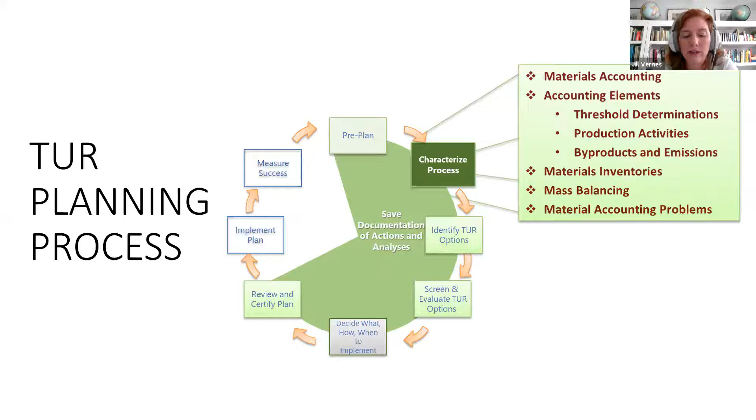Next slide, please, Dan. These are the big topics we're hoping to cover today. Data quality and validation—there are lots of simple checks you can do to ensure your data is accurate, correct, and representative of what's actually happening at your facility. It's essential to maintain consistency between what you report on your Form S and the numbers you use in your TUR planning process, but it's not necessary to reinvent the wheel. Lots of the material you produce for reporting can be used in planning and vice versa. Make sure you're using a good unit of product that will show TUR improvements, and there are lots of different options for that.

We'll have a discussion about that when we get there. And then integral recycling, which can be a tricky thing to wrap your head around, but make sure your integral recycling meets the TUR definition so that you can take credit for it when you get to the planning process. Next slide, so we'll jump into data quality—again, these are tips and tricks for getting better data sets.

Better data sets mean closer alignment between the materials accounting used for reporting and the TUR planning process. Again, I really want to ask that when we get to breakout rooms or polls, don't hesitate to share any ideas or best practices, or even pop those in the chat where they can be accumulated later. So just real quick, we'll run through some simple ideas you can use to help make sure you have a better data set.

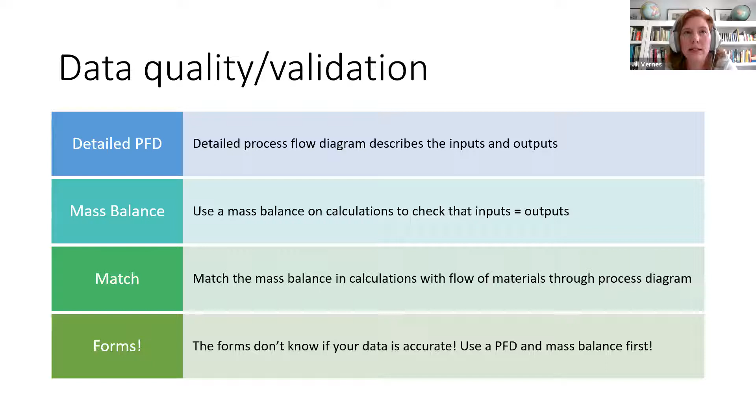So here's our first polling question. I've just launched a poll, and the question is: how often do you update your process flow diagrams? I'll give you a minute to fill that in. Do you do it every year? Every planning cycle? Every 5 years or so? Only when prompted by a production change or an engineer's comments? Or do you never do it, or not know how often it's done?

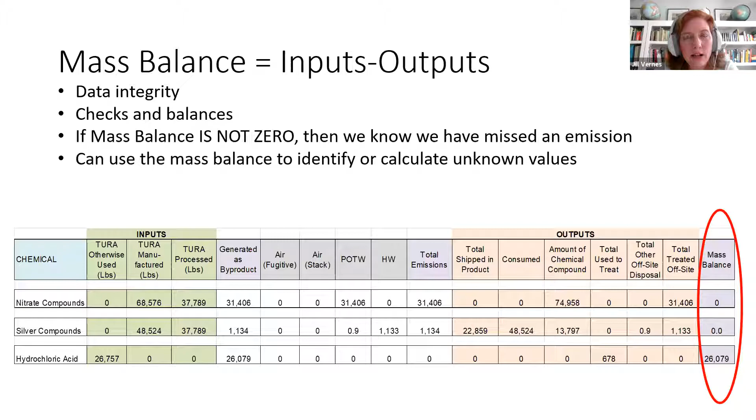I just wanted to real quick look at the difference between byproduct and emissions. Oftentimes they are the same. So in the case of nitrate compounds and silver compounds, the emissions are also the byproduct. But with hydrochloric acid, quite a bit of that is byproduct, but none of it is actually being emitted.

So what's the difference between byproduct and emission? Byproduct is anything that's not going into your final product, so that's a lot of the chemicals we account for as planners. It's the emissions, but also any material used to treat or pre-process materials in production, but not going out with the product. That's different from emissions, which are releases of toxic or hazardous substances to the environment. So byproduct includes emissions and also other non-product outputs.

Here we have a breakdown in my example of mass balance considerations. We'll jump to the bottom of this table on the left. For hydrochloric acid, all of that 26,758 pounds is being otherwise used in the process - some sort of treatment of materials in production, or maybe wastewater treatment, but not material going out with the product. Compare that to nitrate compounds or silver compounds.

In this case, this is a silver plating process. We've got silver nitrate being processed in the chemical processes to create that silver plate. In the chemical reactions, we're coincidentally manufacturing different compounds that need to be accounted for in the TUR process - those are all of our inputs on the left there. We need to make sure we're accounting for where all of that material ends up, whether shipped on the product in the case of silver, or sent to wastewater treatment in the case of hydrochloric acid and the nitrates.

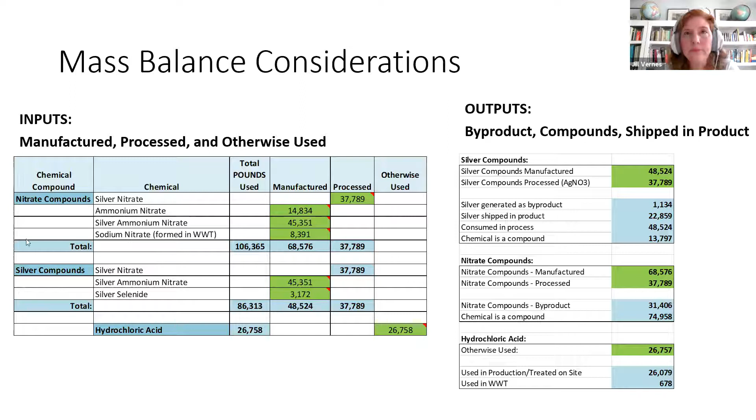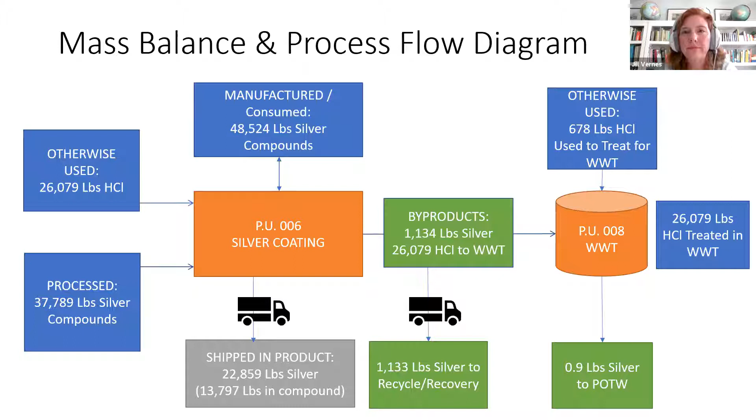We want to look at these things together and look for patterns of alignment. This process flow diagram is something required by the planning process, so you may have to change the numbers each year, but you should have this detailed process flow diagram already developed, which will help you analyze your data in conjunction with the mass balance.

Pam, do you want to say something else about that? No, I think that's it, thanks Jill.

I'll go ahead and launch a poll. We're asking you to take a look at both the mass balance and the process flow diagram and let us know what you see with respect to why the mass balance does not equal zero for hydrochloric acid.

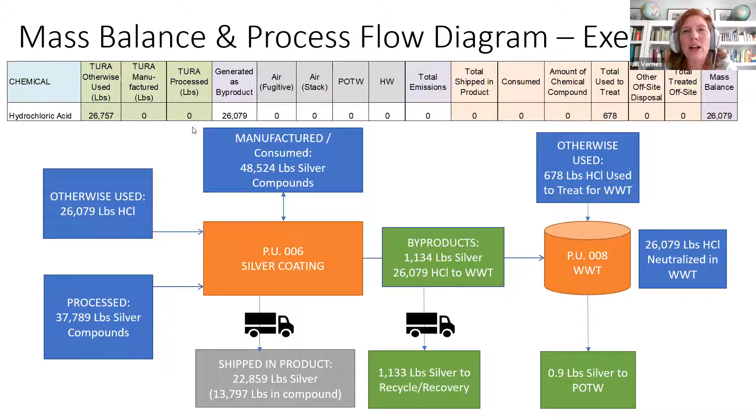And you can then match this 26,079 pounds in the mass balance where it's off to the 26,079 pounds that's neutralized in the wastewater treatment. But I also would like to request again that if there are other conceptual tools that planners use to check for mass balance and to check for alignment and consistency between the numbers you generate for reporting and the numbers that you use in your planning, please share those.

Either go ahead and speak up, I guess, or you can raise your hand electronically with Pam, or put those in the chat, because these are tools that we use. We use them for a lot of our clients, but we certainly don't have a monopoly on good ideas. So I'm always looking for good ideas as well.

Thanks, Jill. Another thing I want to point out is we had a couple people who thought that perhaps the hydrochloric acid was being shipped in product, and that's possible. So the question is, was there a trace amount of hydrochloric acid being shipped out in the product, and how would you determine that? A couple people responded that hydrochloric acid was emitted

to the POTW. I can see how that might have been the concern, knowing that it was generated as a byproduct. Right. And as we say, byproducts can be emissions, but they can also be non-product outcomes from the process that don't actually get emitted.

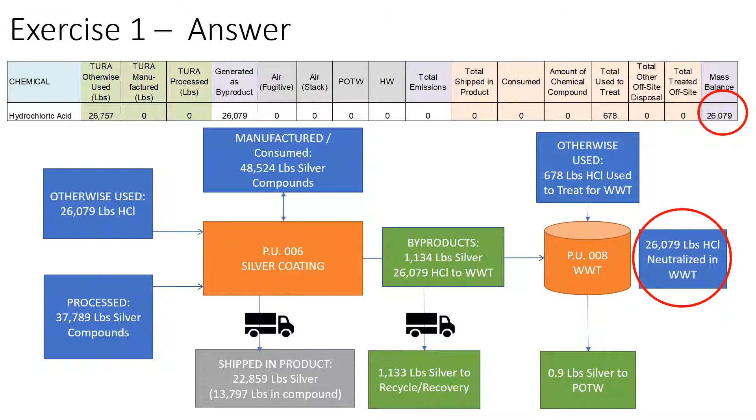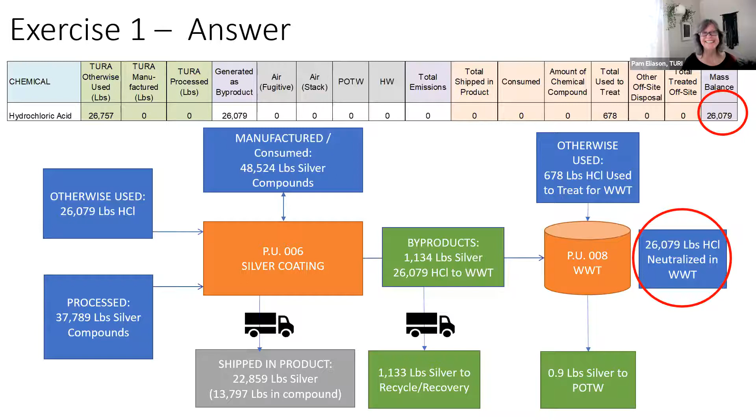It's all right. And John, also remember too, that they were trying to simplify this to make a point. Yeah, good point. Okay, thank you. Thank you. Yep, thanks for your question.

All right, so here we're going to have a little exercise, critical thinking. So here's some numbers from 2019, 2018 hydrochloric acid usage. Take a look at the numbers and think about them. Maybe they're right, maybe they're wrong, but what are some questions you might ask the folks at your plant, your clients? What would you question, circle back around and say, maybe it's right, maybe it's wrong, but I want to make sure we have it right and make sure everything adds up correctly year over year.

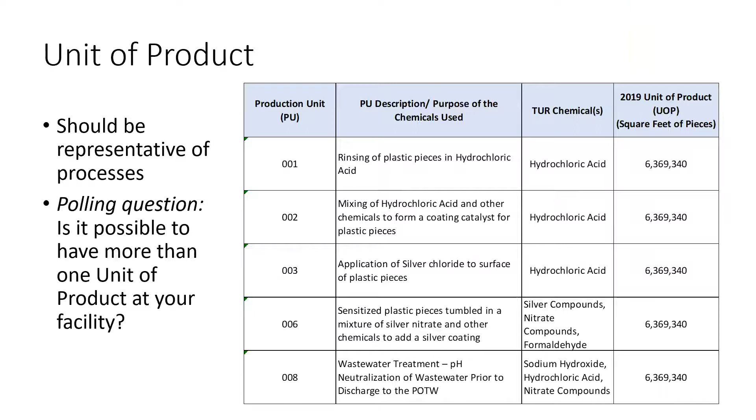So which unit of product do you want to use for your facility? This is not mandated by DEP. They don't dictate that depending on what process you use, you have to use a specific unit of product. It's up to the facility to try to get at what is the best representation of what you're processing and how you're measuring that relative to how you're using the chemical. So if you're mixing something into a paint, maybe you want to use pounds or gallons. If you're processing wire, maybe it's linear feet or miles.

In this example, we have a production unit of square feet, and it's normalized to the chemical. The reason you do that is based on how much chemical you use, you want to figure out how much of that chemical is used per your unit of product, per square footage, per gallon, per pound, whatever the case may be. So year over year, you can look at that information and say, production went up in 2019, but we used less silver compounds to manufacture the same 1,000 square feet. So even though production went up, we used less material, meaning we're doing toxic use reduction. With the same production ratio, we also did it against hours of operation.

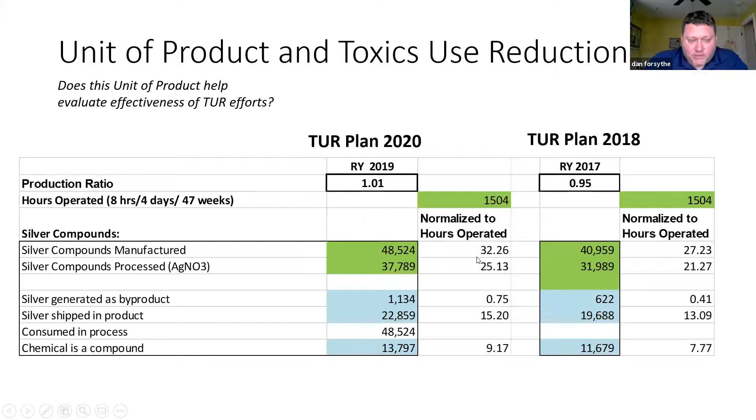The facility operated the same hours of operation, and production went up. But this may not be the best representation because it looks like usage went up relative to the hours, when we know that based on a better unit of product for this process, it actually went down. So it's important to take a look at what you're doing, and think strategically about what you're processing, how you're processing it, and how the chemical is being applied or used. How can you best represent that so that when you look at it year over year relative to the normalized data, you can see the actual trend of whether it's going up or down relative to what you're producing.

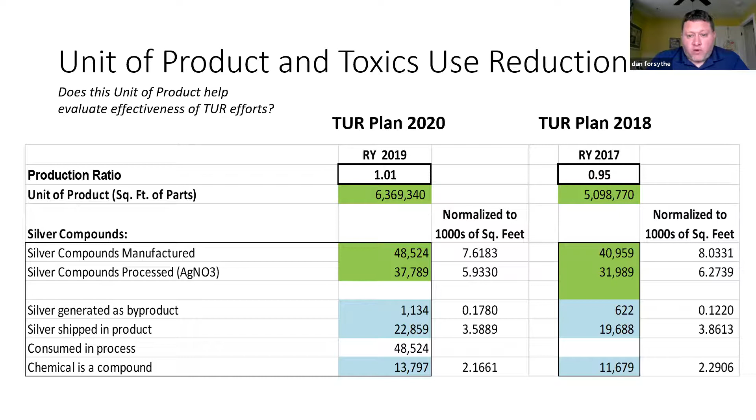Again, this isn't dictated by DEP. They don't tell you what unit of product to use, so you can use whatever makes sense for your facility — revenue, number of widgets. Sometimes if you're cleaning with a solvent but have hundreds of parts with intricate designs going through it, calculating surface area, which may be the best unit of product, is near impossible. So maybe you use number of parts degreased instead. You have to look at it and figure out what would best represent what you're doing relative to the toxic you're using.

So Pam, again we have another polling question just to generate some conversation: which production units do you folks use in your operations, or that you've seen? Note that you can choose more than one if you have more than one.

This is good, it looks like it's spread out all over the place. Nice. Give it a couple more seconds, and then I'll end the polling.

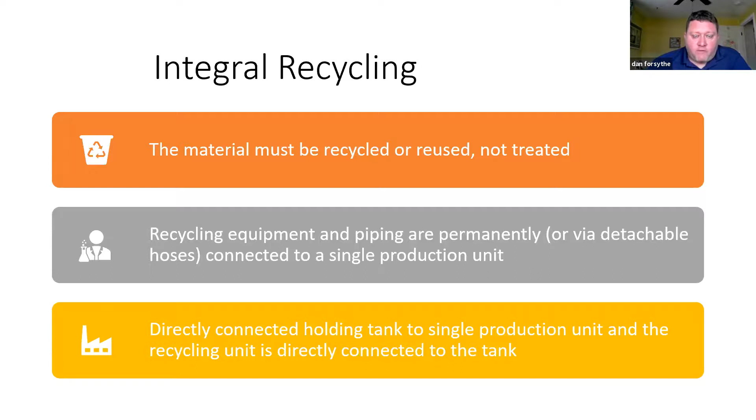So I have three examples to go through. In this example, I'm just using simple TCE. So they use 18,500 pounds of TCE. It's integrally recycled to the degreaser itself, connected to a still right there. Sometimes they have to do cleanouts and whatnot.

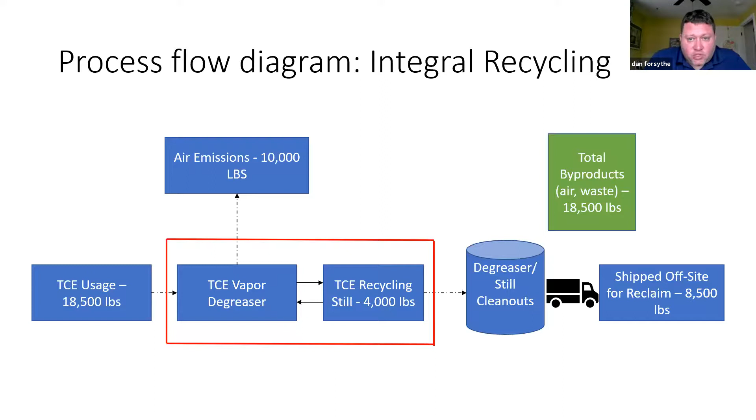So what is my byproduct in this situation? Well, it's what gets shipped off and what goes up to air. So in this case, it's just a pass through. The recycling is not taken into consideration, so it doesn't add to your byproduct and it doesn't add to your usage because it's integrally recycled.

If it's not integrally recycled, it's the same situation with TCE, but you don't have a still directly attached to or connected to the degreaser - you have a still someplace else in the facility. In this case, you wouldn't add it to the usage, so the usage would still be 18.5, but you would add it to your byproducts. That's where in the forms there's the option to balance it off by saying you've recycled X amount or whatever the case may be.

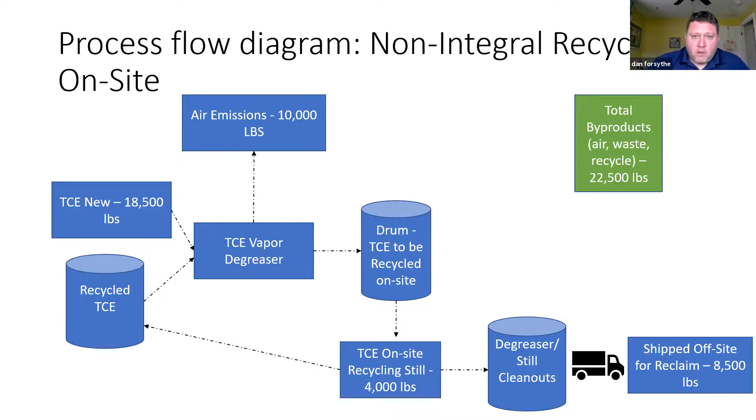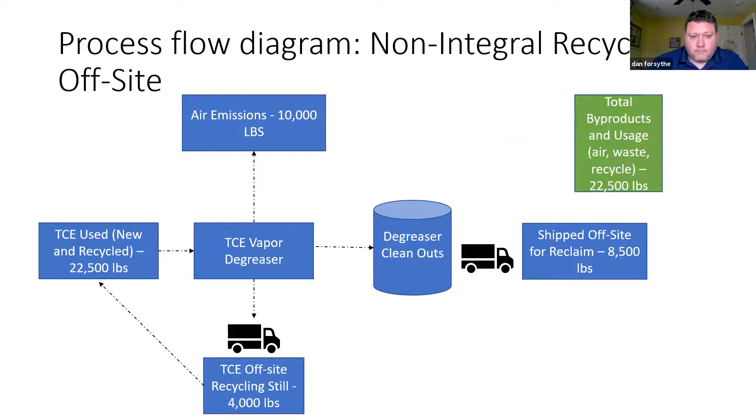So does your facility or a client do integral recycling, or does your facility do any other type of recycling that's not integral? If people would like to share some unique scenarios, that would be wonderful. Once we get the results, if anybody's willing to talk about something that was integral recycled, maybe other than TCE, or some examples of recycling of toxics that is not integral, that would be great.

Okay, I'm going to give it a couple more seconds. We've got some people still thinking on it, putting in their results. Okay, I'm going to end the poll and share the results.

So for those that do integral recycling, is there any examples you have, maybe TCE included, but other than TCE? Or on the flip side, some recycling that you may do on site or off site that you put back into your process - maybe you can give us some examples. That would be great if you're willing to share those. So does anybody have an example they'd like to offer?

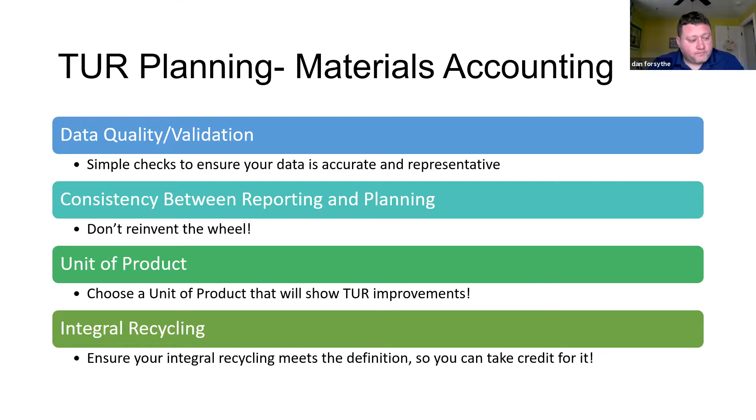So if anybody has any further questions or things they'd like to share, by all means, ask. And that's all we had. Thanks so much, Dan and Jill, both. Pleasure, really great. Thank you, Pam - a good refresher on the things we need to think about when we're doing our materials accounting.